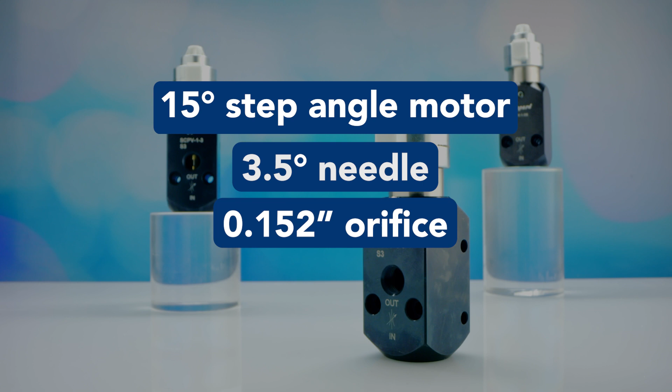Traditionally, the SCPV needle valve has been our big stepper-driven proportional offering. Using a 15-degree step angle motor to position a 3.5-degree needle through a 152 thousandths orifice, it provides very accurate variable flow control. But it can't provide the finer levels of control of lower flow rates for fluid and gas that your molecular level and/or hostile applications require.

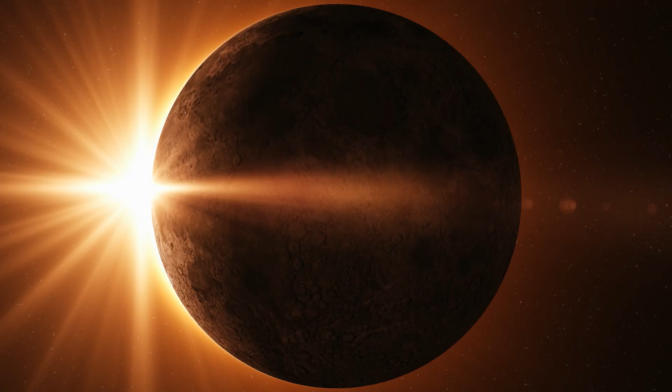This is where the Eclipse, our patented stepper-driven proportional isolation valve, comes in. Instead of a needle profile, it features a sweeping slot that provides true zero dead volume, less than 1/1000th of a cubic inch, and is fully flushable.

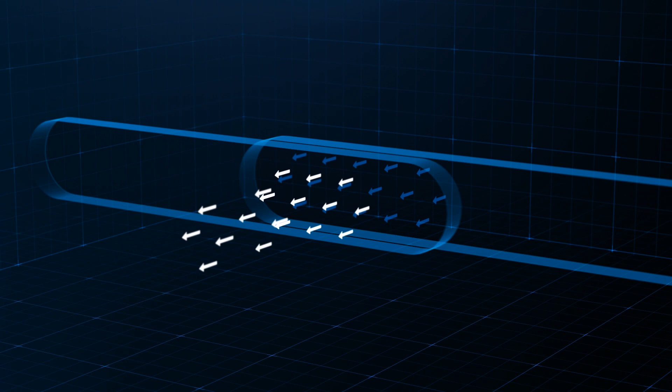This is accomplished by using two lapped surface ceramic plates, with the top plate being driven by our NEMA 8 1.8 degree step angle stepper motor. This new motor is a significant enhancement to the overall control of the valve.

With the Eclipse, the approximate 24 thousandths flow path can be controlled and varied by microstepping the position from full step to as little as a 16th step. In other words, you can change the position of the approximate 24 thousandths flow path up to 18,000 times.

So the Eclipse provides a completely inert, wetted, fully flushable flow path, is bi-directional control, and the ability to be microstepped to as little as a 16th step. But also, because of the unique design of the flow path profile, it gives you the ability to create a soft start. As you can see here, our flow paths are rounded.

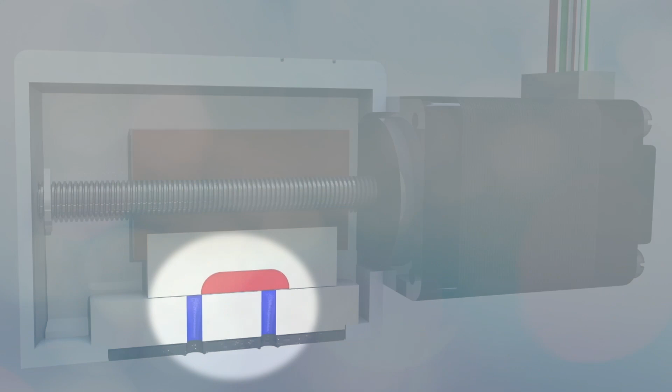As the top plate transitions across the bottom plate, the radii edges of both flow paths, as they overlap, create an eclipsing of the two flow paths. This allows for a finely controlled soft start that gradually introduces your fluid or gas into or out of critical control areas at a controlled ramp rate to prevent damage or turbulence.

Finally, we provide an encoder shaft for you to connect to if you decide to attach an encoder. What's nice about the encoder shaft is it acts as a manual control override when power is lost.

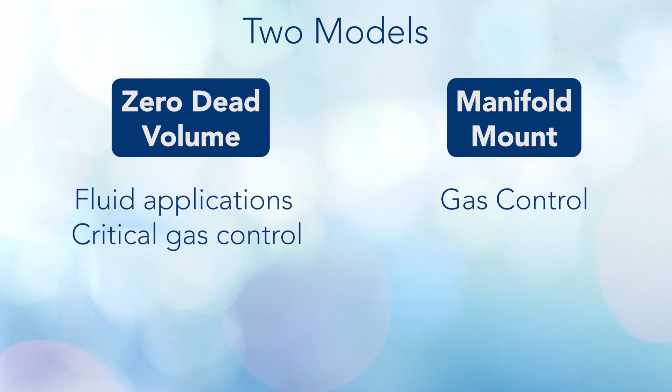The Eclipse comes in two models, a zero dead volume version for fluid or critical gas, or a manifold version for gas control. With either version, the standard offering features a flow path that is fully flushable and composed entirely of inert ceramic, ensuring compatibility with a wide range of media and making it more than ready for hostile fluids or gases such as ammonia.

For applications that demand exceptional liquid or gas control, Clippard's Eclipse offers outstanding precision and unrivaled resolution.